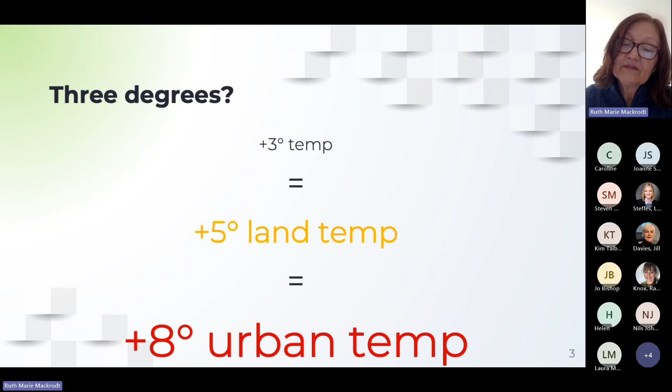And 3 degrees temperature increase represents a 5-degree land temperature increase, which in turn represents an 8-degree urban temperature increase. The United Nations called this a hellish scenario, and it really would be. I think we all know that we would see large movements of people, massive interruptions in the food supply, and huge rises in sea levels. That is if we continue on our current path.

Now, within the UK, one of the most significant contributors to greenhouse gases is the built environment. It is responsible for around 30% of our emissions every year. Globally, in fact, the figure is a little higher than that, at around 40%, but in the UK it sits around 30%. And of that 30%, 1/3 is actually the carbon emissions used to make the materials we use in those buildings. So not the heat and the light that goes to running them, that's the operational carbon, but actually the embodied carbon of materials.

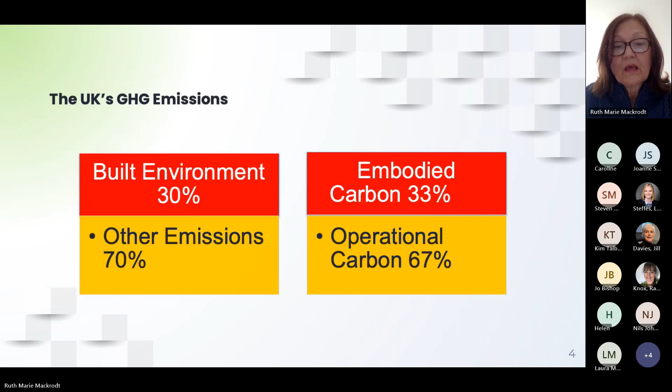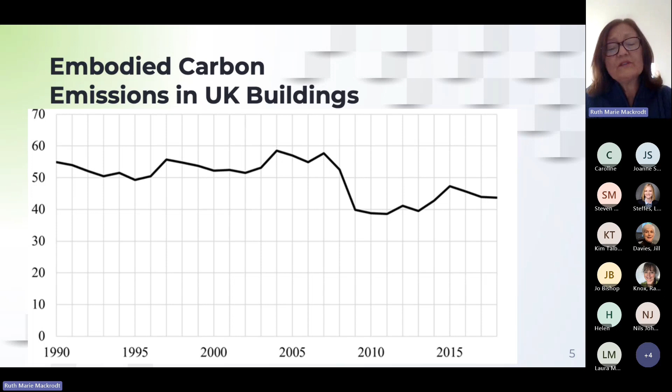And this chart shows you how much progress we have made in reducing the embodied carbon of materials over the last 35 years. And the answer is not very much. We have managed to reduce it by a grand total of around 17%, which means that in the next 25 years, we are going to have to do a lot more and a lot quicker.

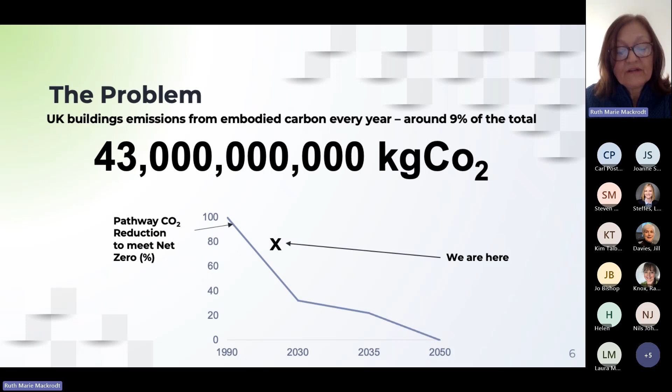In terms of actually what that means in terms of numbers, the embodied carbon emissions from our building materials every year is represented by 43 billion kilograms of CO2. And the chart below that will just show you how very far we are off target. The pathway set there is a pathway to net zero, which was set by the UK Climate Change Committee, and it's their balanced pathway to net zero. And you can see that we are very far off that target. And this is really how far we need to get to.

At the moment in the UK, the average house contains around 800 kilograms of embodied carbon emissions per square metre. And the very best low embodied carbon housing we can build today contains around 150 kilograms of embodied carbon per square metre. And if we're to get to anything like net zero, we are going to have to learn to build at less than 7 kilograms of embodied carbon per square metre.

So if we're going to have to get anywhere close, we are going to have to completely rethink the materials that we build with. And this is especially true given the urgent need for new housing. Because if the UK was to embark on the kind of house building programme it so desperately needs without changing how it builds, you could easily see the emissions figures for construction's contribution rise, not fall.

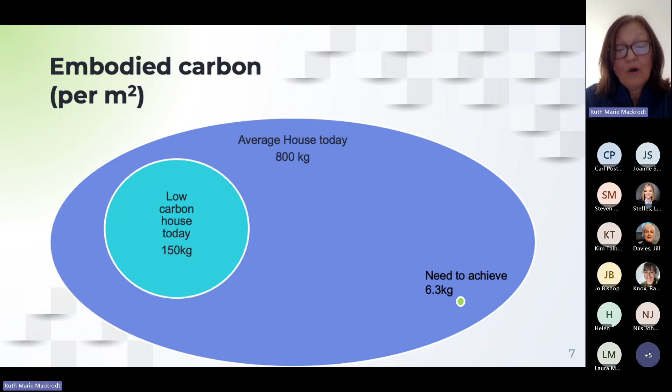And even the housing stock that we currently have poses very particular problems. In the UK, our housing is, in general terms, older and leakier than many of our European neighbours. And that means that in order to make it more energy efficient, we have to use more materials to insulate it.

Now, when I mentioned rethinking the materials we use, one of the most obvious choices to use are bio-based materials such as wool. It's very easy, I think, to think of natural products as somehow simple, less sophisticated than man-made materials. But they are not. They have been thousands, sometimes tens of thousands of years in development in the very harshest testing lab that there is.

If you think for a minute of all the failures of man-made building products over the last few decades, asbestos, high alumina cement, and the recent issues around RAAC. If wool had failed as an insulating material, it wouldn't exist. It would have been evolved out of existence.

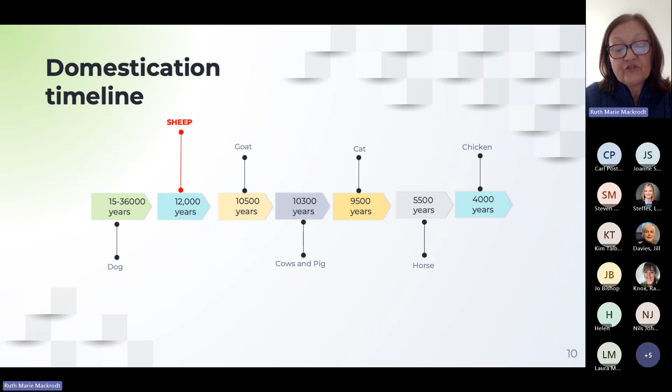Sheep are actually the second animal domesticated by humans, and they have been with us around 12,000 years. So wool is familiar and it is everyday. But it is also, in the true scientific sense, a smart technical fibre which reacts to the conditions around it, making it an ideal material for construction.

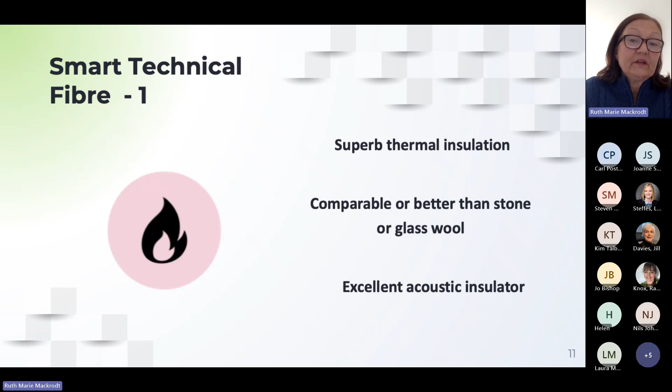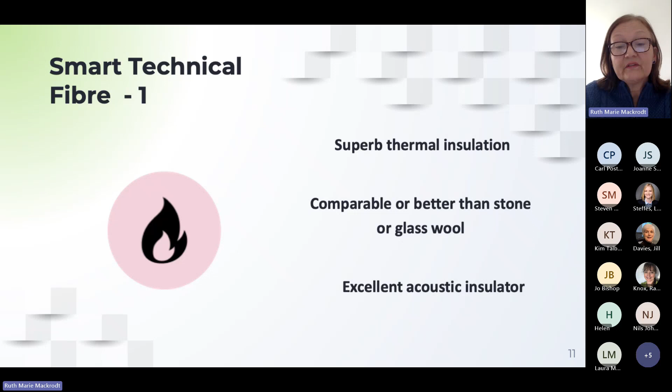Now, it won't surprise anybody that wool is a superb thermal insulator. It is comparable or better to both stone wool or glass wool, and it is also an excellent acoustic insulator. But in a warming climate, management of cold is not the only thing that you want from an insulating material. You also want something that will manage heat successfully. And wool does this far, far better than man-made products.

It has a very high thermal mass and a very high specific heat capacity, which means that it basically transfers heat far more slowly from the outside of a building to the inside of a building. Because in the end, what insulation tries to achieve is the greatest level of comfort for a building's occupants for as much of the time as possible, using as little energy as possible. And wool does this very successfully in winter and in summer.

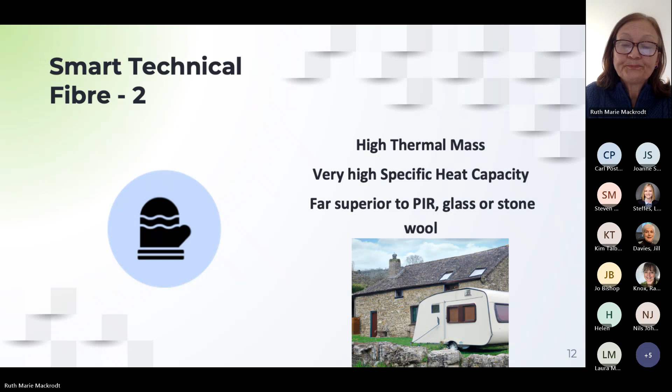But wool also has some other technical aspects that make it particularly interesting as a construction material. The outside of a wool fibre is hydrophobic, so it repels water in liquid form. But the inside of a wool fibre is hygroscopic. And hygroscopicity is the ability to be able to absorb water in vapour form in times of high humidity and release it in times of low humidity. And this is exactly what you want in a building.

Water in buildings, besides things like floods and your roof tiles falling off, is primarily in vapour form. The showers we take, the cooking we do, the kettles we boil, and the air we breathe in and out. And hygroscopicity is critical in managing damp and humidity. And damp, as well as temperature, have significant effects on human health. And the current cost in the NHS of dealing with illnesses associated with cold and damp conditions runs into tens of millions of pounds every year.

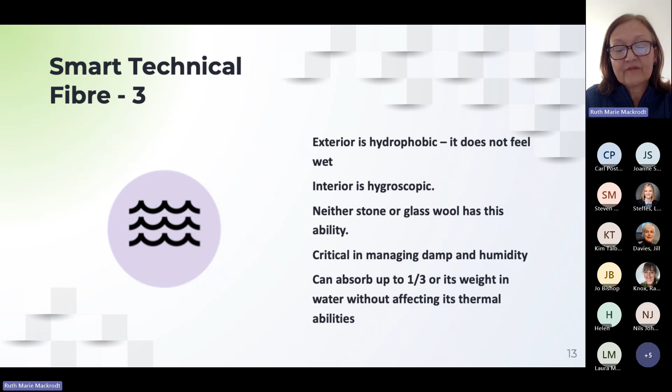And this ability of wool to be able to handle moisture is not really surprising if you think about it, because wool has evolved to keep sheep warm, whether they live in a wet or dry climate. And let's face it, in the last few months, the rainfall has certainly evidenced that.

And wool also has one or two other abilities that are never found in man-made materials. It has the ability to absorb and lock away volatile organic compounds, things like formaldehyde. And these chemicals are found in construction products, they're found a lot in furniture, and they're found a great deal in cleaning materials. And they are respiratory irritants that cause illness in humans. And the ability of sheep wool to be able to absorb these and lock them away is a strong contributor to a healthy indoor environment for us.

Now, it's incredibly important, obviously, that we reuse, we recycle, and we repurpose man-made materials so that we can extract every bit of use out of them for as long as we can. But in the end, we're going to have to use more and more truly circular materials, and that very often means bio-based materials.

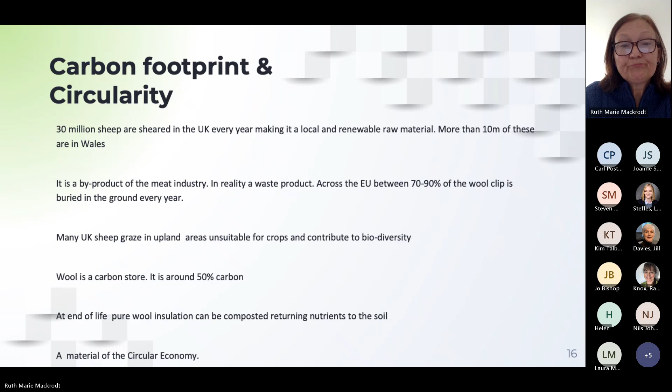I wanted to share with you some real life figures about the impact of what some of our materials choices can mean in terms of CO2 emissions. This chart was prepared based on data for a research paper by Cardiff University in 2019. And it shows the kilograms of CO2 emissions per meter cubed of various insulating materials. And you will see there are some very stark differences there. PIR at nearly 120 kilograms per meter cubed, going through stone wool and glass wool at about 44, down to sheep's wool at about 0.8.

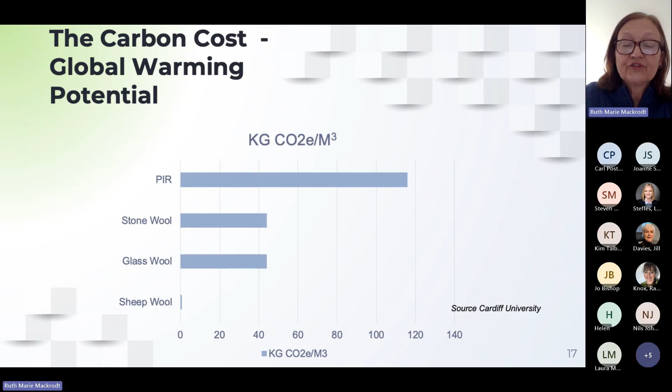And how that translates in terms of an average semi-detached house, assuming it needs 50 square meters of insulation: the difference that you create when you make different choices between PIR and, say, sheep's wool, you are making a contribution of saving more than 5,200 kilograms of CO2.

But wool has other benefits that go to the heart of a fair and green transition as well. In 2022, the cost to shear a sheep in the UK was around £1.30. And the money received by Welsh farmers in the same year on average was around 11p. And clearly that is a huge drag on the rural economy. Within Wales, that comes to the tune of tens of millions of pounds per year. And everyone on this call will either have sheep or know someone who has sheep. And we all know that the rural economy is under huge pressure.

And wool's use in construction is one of the very few industries that has the volumes necessary to change the wool price and recirculate funds back into the rural economy. And it is therefore a perfect example of how a shift to a circular economy material can add real, local, measurable economic value and be a fair choice as well as a green choice.

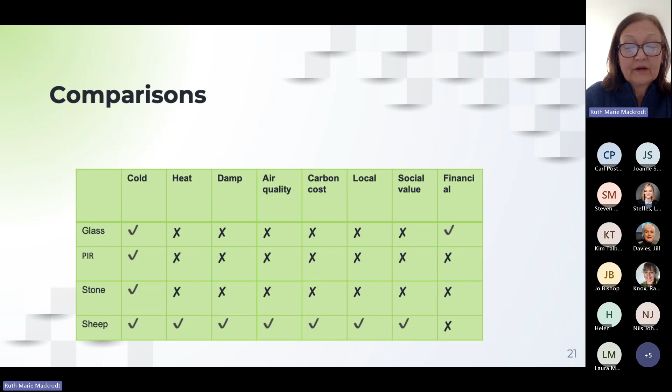The use of circular economy materials is all around sustainable development, meeting the needs of the present without preventing the ability of future generations to meet their own needs. Given where we are today, the needs of future generations isn't some point in the distant future, but our children's needs, and for many of you who are a lot younger than I am, your own needs. And I hope this has given you an example of how just changing the materials that we choose can have a very significant impact. Thank you very much.